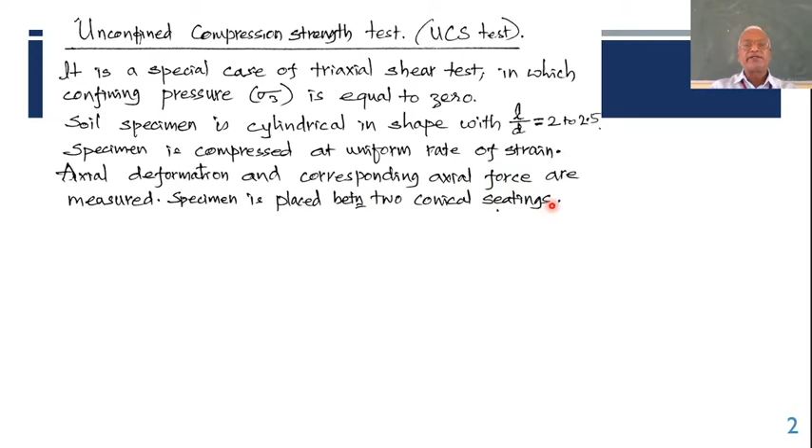When it is placed, it is not flat here or here. The plates between which the specimen is placed, if you exaggerate, will be having slightly a conical shape. I hope you can imagine. Here also this point will be a conical shape. Of course the cone will not be a cone to penetrate, like from the top if you look at it, it will not be like this, very flat, hardly any angle, but there is some inclination. It is not perfectly flat, so that when it is compressed it will not be putting a lot of friction, it expands easily without much friction.

This surface, the top as well as bottom surface, will not be putting a lot of effort to expand itself. That's why it is made conical. You will not be able to observe this with just a normal look, but if you consciously see how the surfaces are, bottom and top, a very fine angle is given so that it is conical.

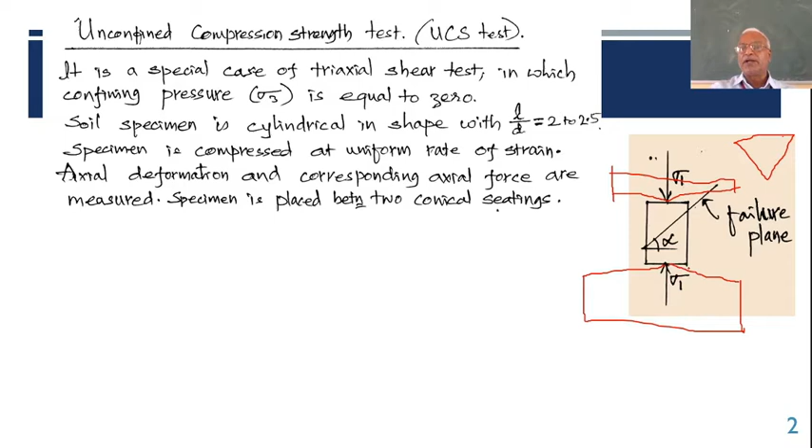The maximum compressive stress resisted by the specimen before failure is called unconfined compressive strength, because there is no confinement. Here there is no confinement, that cell pressure is 0, it is unconfined, that's why it is called so, and you go on applying compressive stress till it fails.

That strength at which it fails, sigma 1, is called Q with a suffix U, that is unconfined compressive strength, and it is equal to the force applied divided by cross sectional area. The force whatever you have applied on the top and bottom - the bottom is fixed, only you are applying from the top through what is known as a proving ring, on which you can read the force indirectly.

So force divided by Ac, the corrected area; A0 is the original or initial area of cross section. If you have taken 38 mm as the diameter, or 3.8 centimeter, pi d squared by 4 gives you A0. But it is to be divided by 1 minus epsilon. Epsilon is nothing but axial strain, that is delta L by L naught. So original length is L naught, that is 7.6 centimeters.

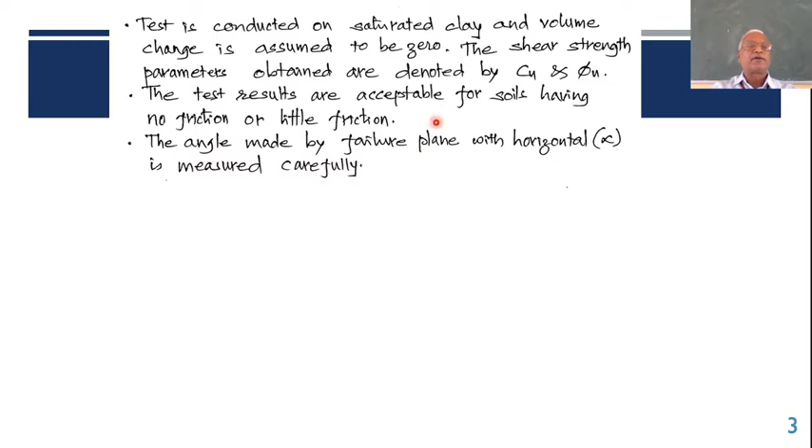The test is conducted on saturated clay and the volume change is assumed to be zero, meaning the volume in the beginning equals the volume in the end. The shear strength parameters obtained are denoted by Cu and phi u. The test results are acceptable for soils having no friction or little friction, that is phi is almost equal to 0. In such cases you can conduct this kind of test.

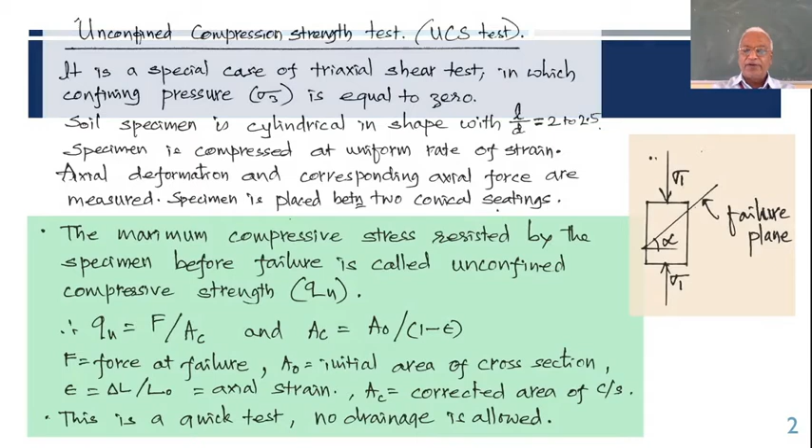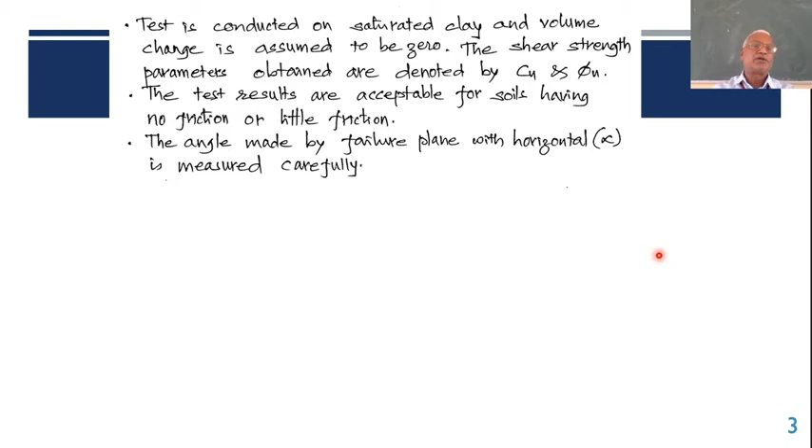The angle made by the failure plane with horizontal, that is alpha, is measured carefully. When it fails, there is obviously a failure plane, and this angle has to be measured properly so that the information is used for further calculations. Generally it is 45 degrees, otherwise if it is slightly more, it will be like 50, 52, 54, 53, and that has to be measured properly.

Alpha is mostly more than 45 degrees. So when it is deformed, it deforms like that. If it has failed exactly at 45 degrees, the Mohr circle for the test will be like this, because you know how to draw the Mohr circle with the basics. This face will give you 0, 0, because there is no normal stress and no shear stress.

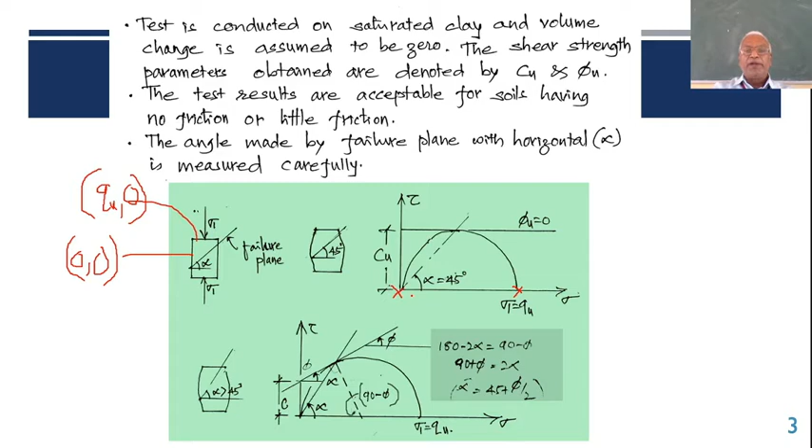That's why the point is at the origin itself, and this face has got QU now, because that is the stress at which it has failed, and there is no shear stress, that's why 0. So the point on the Mohr circle will be QU, 0. These two planes are mutually perpendicular, that's why this should be a diameter. So take the midpoint and draw the circle, that will be the Mohr circle.

Now try to find the origin of planes. How do you find it? I got a horizontal plane, and this plane is represented by QU, 0. So if I draw a line, I get here, so this itself becomes my OP, origin of planes.

Now the failed plane is at an angle of 45 degrees. When I draw a line, I get to the topmost point of the circle, and then when I place a tangent to that point, that will be the failure envelope with equation tau f equal to C. There is no contribution as far as phi is concerned. Otherwise, the general equation would have been tau f equal to C plus sigma tan phi.

Now because phi is 0, the value of tan phi is 0, so sigma tan phi is 0. That's why the equation remains as tau f equal to C in case of the unconfined compression strength test.

Generally this is the case. Otherwise there may be a slightly more angle, alpha may be a bit more. In such cases, maybe it has failed there, and that will be making an angle of phi, which will be nearly 0 or maybe 5 to 10 degrees in that range. With that, alpha is over here.

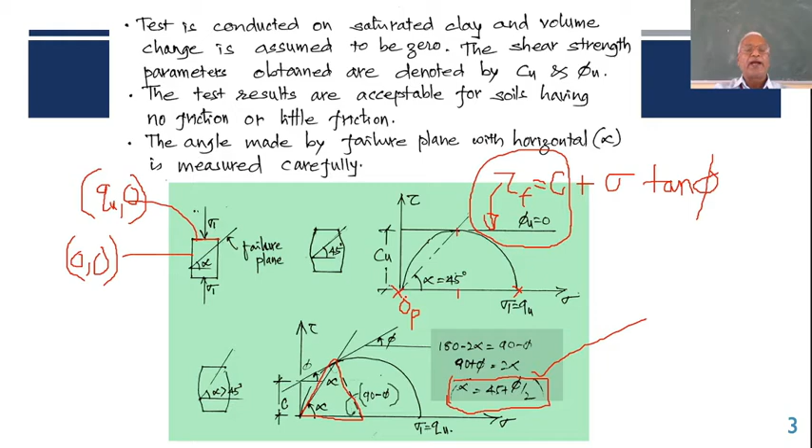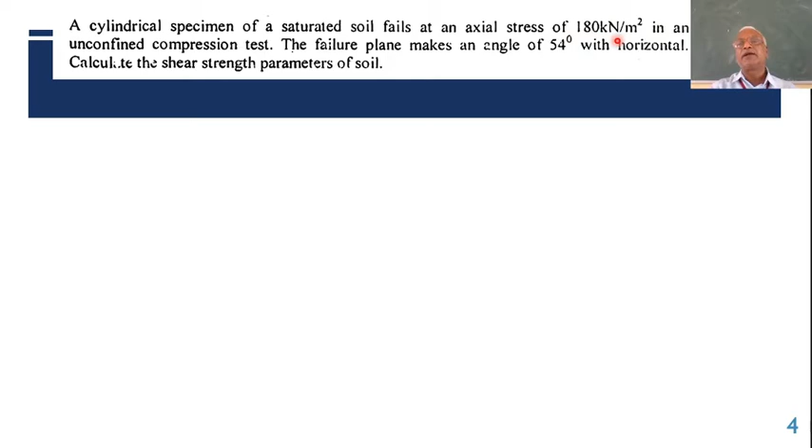Here is an application, one numerical problem I have solved for you. A cylindrical specimen of saturated soil fails at an axial stress of 180 kilonewton per meter square. So 180 kilonewton per meter square is nothing but QU now. Directly the stress is given. If load is given, you have to divide by area, but here directly the stress at failure is given in an unconfined compression test, so it is a UCS test.

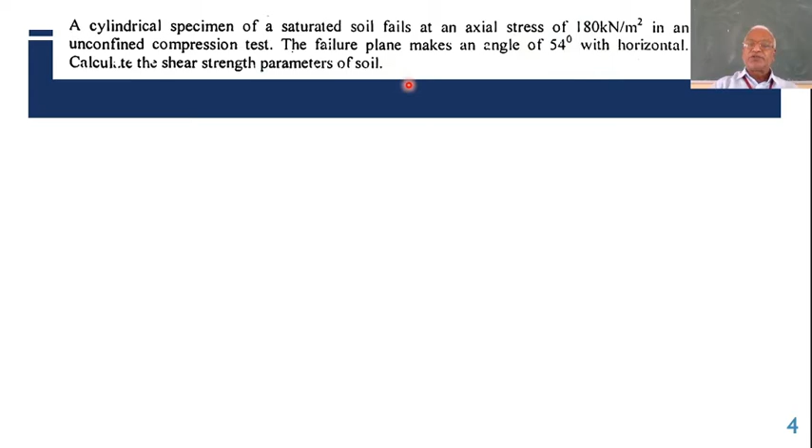The failure plane makes an angle of 54 degrees, this is alpha, with horizontal. Calculate the shear strength parameters of the soil. Very straightforward problem. If I draw the sketch, sigma 3 is 0, sigma 1 is 180. So straight away alpha is 45 plus phi by 2, and 54 is given. If I calculate, phi becomes 54 minus 45, that is 9 into 2, 18 degrees.

Now through this I can calculate Ka and root Ka. Root Ka is tan of 45 minus phi by 2. Ka is tan squared of 45 minus phi by 2. I hope you remember those expressions, otherwise I'll just write them. Ka is nothing but 1 minus sin phi divided by 1 plus sin phi, or it is tan squared of 45 minus phi by 2.

It is only phi by 2, not 45 by 2, right? So this is phi by 2 that has to be minused from 45, and if you write tan squared, then it will be K. If it is root K, it is only tan 45 minus phi by 2. So anyway, you will get the value of K, and then use this equation sigma 3 equal to sigma 1 K minus 2C root K, in which K is already known.

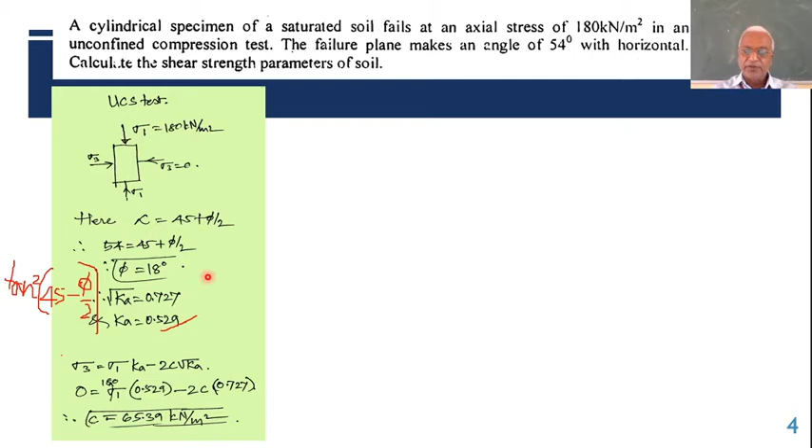But if you draw the graph, the Mohr circle, then this plane, as I told you, vertical plane is 0 0, horizontal plane is 180 0. Here I have drawn 0 180 0. So I draw a circle, then failure plane, origin of planes. If I draw a line parallel to horizontal through 180 0, I get a point which is OP, origin of planes.

The angle of failure plane is 54 degrees. So I draw a line at an angle of 54, and there it intersects. So there I draw a radial line and a line perpendicular to that is inserted so that it becomes tangential. Then I measure this angle phi, which is 18 degrees. How much was ours? Same, 18 degrees. This is angle phi.

And then the intercept on the y-axis gives you the cohesion. So it is 65.39 kilonewton per meter square, the same units. So here it is 65.39. So that's how you can solve it, maybe the graphical way by drawing the Mohr circle.

It is easy if you are well versed with your geometry. Otherwise, analytically you should be able to solve it in this manner, right? Whichever method is fine, unless they mention anything. If they say you have to solve it by graphical method, you have to go for Mohr circle. If they don't mention anything, you are left with both options open.

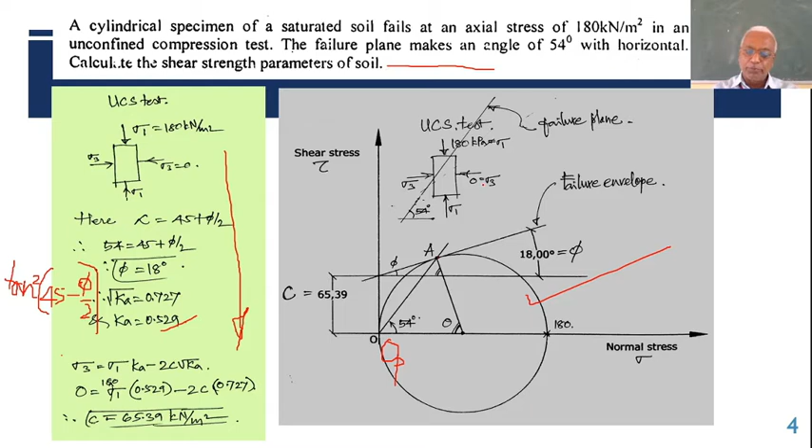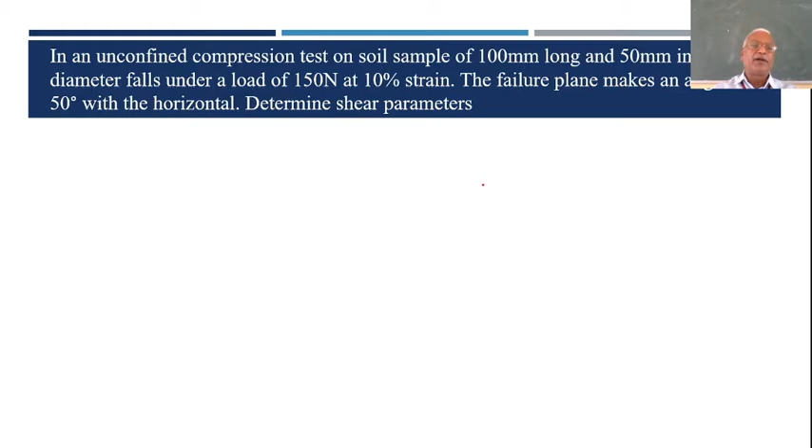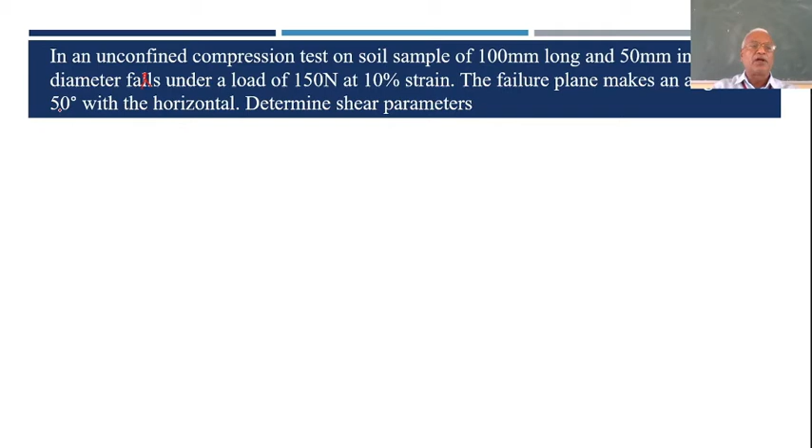Okay, there is one more. In an unconfined compression test on a soil sample, 100 mm long and 50 mm in diameter, it fails under a load of 150 Newton at 10% strain. Epsilon is given, right? Load at failure is given. Cross-sectional diameter is given. The failure plane makes an angle of 50 degrees with horizontal, alpha is given. Determine the shear strength parameters.

Here cross-sectional area is pi 5 squared by 4. I have put it in centimeters. 50 millimeters is 5 squared by 4, that is 19.63 centimeters square. Corrected area, corrected cross-sectional area, AC is given by A divided by 1 minus epsilon. So 19.63, A naught or A original, divided by 1 minus epsilon, 10% strain, so 0.1. It comes out to be 21.82 centimeters square as the corrected area.

Now UCS, unconfined compression strength, will be QU, the ultimate load divided by area. Load is 150 Newton at which it has failed. 150 Newton divided by 21.82 centimeters square gives you 6.875 Newton per centimeter square as the shear strength. But if you want to convert that into kilonewton per meter square, you have to divide Newton by 1000 and divide every centimeter by 100. So in the numerator you get 100 into 100, in the denominator you get 1000. That's why you end up with 68.75 kilonewton per meter square, also called kilopascals, 68.75.

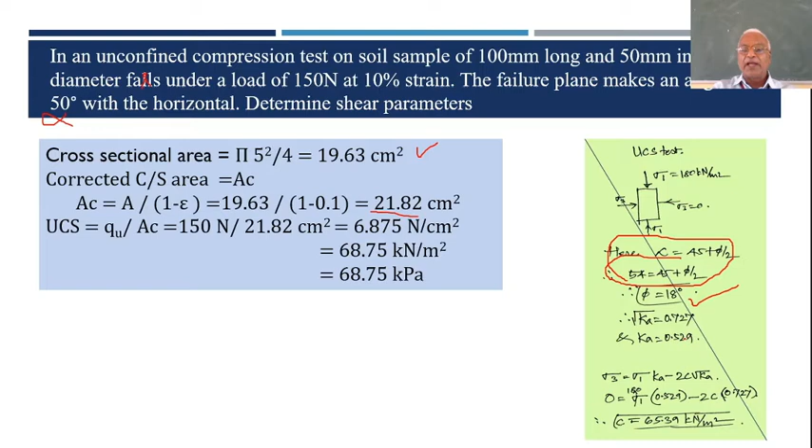Okay, now further it is the same as the earlier problem. Because of that I have just given this, I have not solved it fully, but the procedure to be used is exactly the same. That's why I have put a line there. It is not the same, but similar. You have to use the same equation, alpha equal to 45 plus phi by 2, alpha is 50, you get some phi, calculate Ka, use that in this equation and find out C. So these are the steps to be followed in this problem. I think you'll be able to solve it.

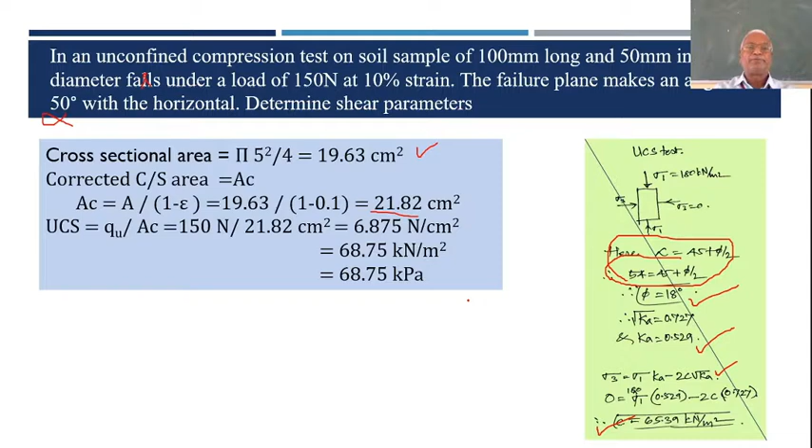Next, based on drainage conditions, we look at the type of shear tests. There are classifications of shear tests, and the classification is very simple to remember. The names are very interesting: UU test, CU test and CD test.

To simulate actual field conditions, three types of shear tests are conducted in the laboratory. Why is it called UU test? The long form is unconsolidated undrained test. CU test is consolidated but undrained test, and CD is consolidated drained test.

CD test is simply called drain test, whereas UU test is simply called quick test. Both nomenclatures are very widely used, so you should know them. UU test, or undrained test, is a quick test, whereas CD test is a very slow test, it takes a lot of time since you have to allow the water to pass out.

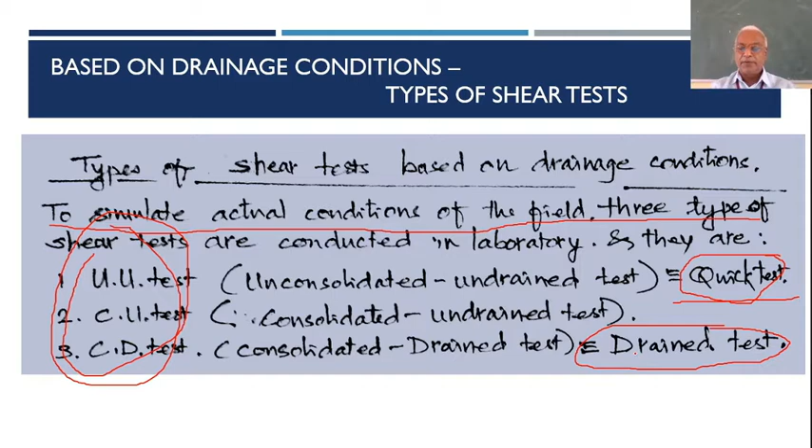Moving to the next slide: essentially there are two stages in any shear test. Note this part - first, application of normal stress, and then shear stress is applied till failure.

What is stage 1? That is normal stress application. In direct shear test, first normal stress is applied, if you remember. Similarly, in triaxial shear test, cell pressure is applied. So the parallel thing in triaxial test is cell pressure, whereas in direct shear test there is a vertical stress applied.

In stage 2, in direct shear test, the shear strain is given and shear resistance is observed or measured, and the maximum shear resistance at failure is noted down, that is tau f, at a particular value of sigma.

In case of triaxial shear test, the axial stress is gradually increased till the soil fails, and that we have called delta sigma, or deviator stress. Anyway, we'll see further.

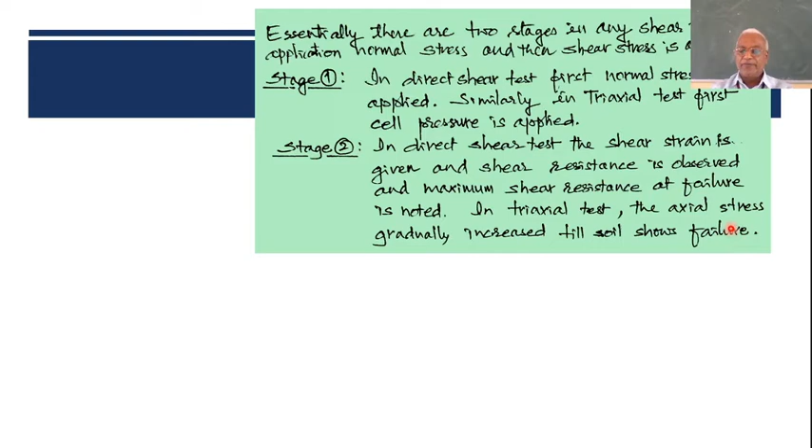So in direct shear test, you apply vertical stress and hold it at that value, go on applying this strain, and the resistance offered at this point is measured. So for one value of sigma, you get one particular value of tau. If you call it sigma 1 applied, you get tau 1.

If you reassemble the soil specimen, for the next specimen you apply sigma 2, maybe an increased or decreased value of normal stress. Again you do the strain, the resistance offered is measured, and if you note down the stress at failure, that identifies tau 2. For sigma 2, tau 2 is there. Like that, the data goes on.

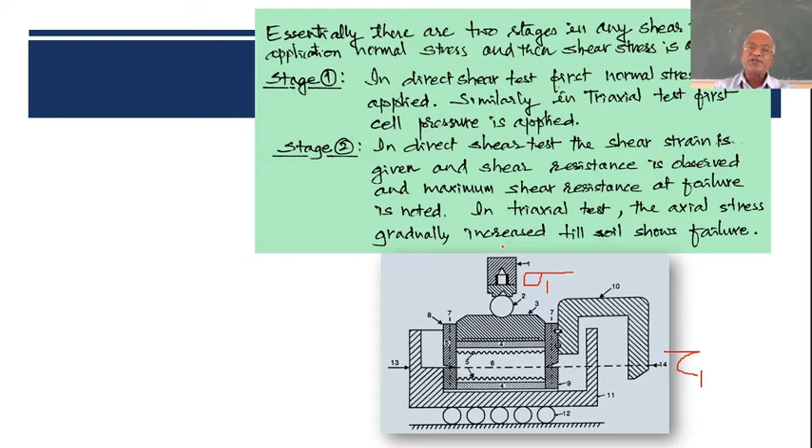Now, in the first stage, when you apply normal stress, if the soil has some moisture in it, the water is squeezed and tries to go out through these porous stones and holes provided. If you allow it to go out, that is allowing the soil to consolidate. Then afterwards, whether you allow it to consolidate or not, you give shear.

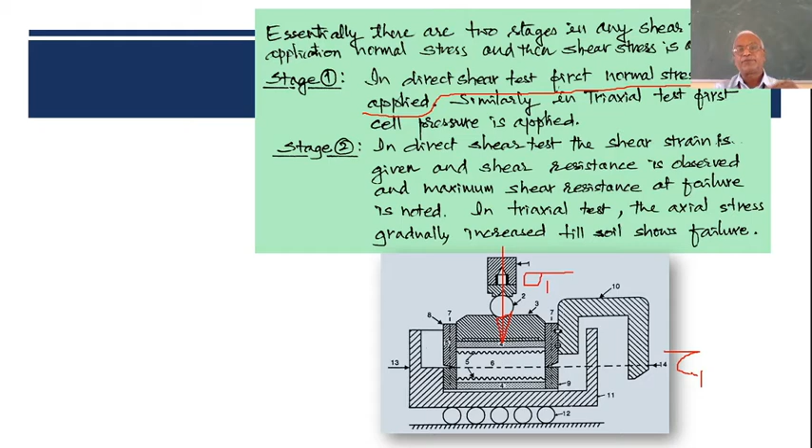In case of triaxial shear test also, the soil specimen is kept here. Now, when you apply the water pressure, it is all normal stress only, everywhere there is normal stress.

When you apply normal stress, if the soil is wet, there is a chance it will ooze out the water or allow the water to pass out. There is an arrangement - you may allow the water to pass out or you may close it. If you allow it to go out, we say it as consolidate, otherwise you don't consolidate, and afterwards you apply a vertical extra delta sigma till failure occurs. That is what is written here - in triaxial test, the axial stress gradually increases till the soil fails.

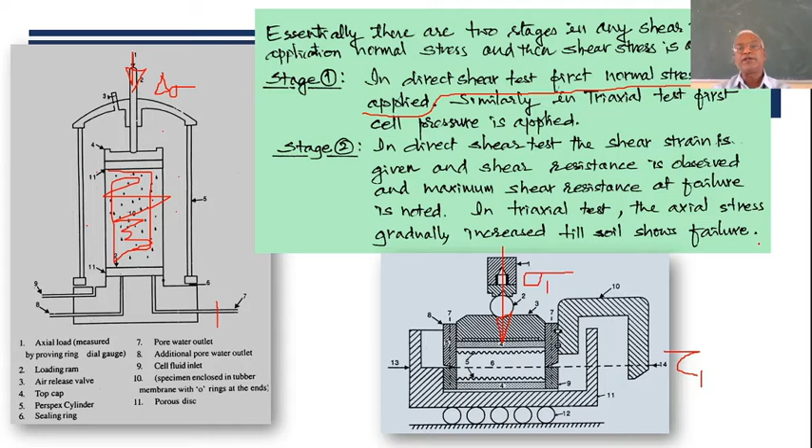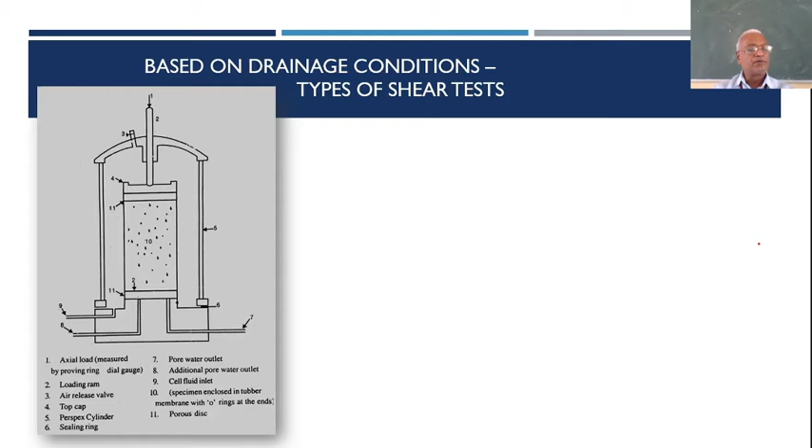So there are two stages you have identified. Now, based on drainage conditions, there are types of shear tests: first one, UU test. I have told you UU, CU and CD test - there are three. Now let's see what is done in UU test.

During both these stages - whatever first stage, normal stress application, and then second stage, shear stress application - in both these stages, water is not allowed to drain. So it is undrained and unconsolidated. Not much time is taken for the test, hence it is referred to as quick test. The resulting shear strength parameters are undrained cohesion and undrained angle of internal friction, phi with suffix u.

That is undrained shear strength parameters. For saturated clays under undrained condition, phi u is equal to 0, hence tau f is equal to cu. This you have seen in UCS test, unconfined compression strength.

We assume that the clay is fully saturated and undrained condition is there, that's why phi u is 0 and tau f is equal to cu.

Okay, now next, CU test. What is the long form? It is consolidated undrained test. Consolidated means what? When you apply first normal stress, you allow the water to go out, right?

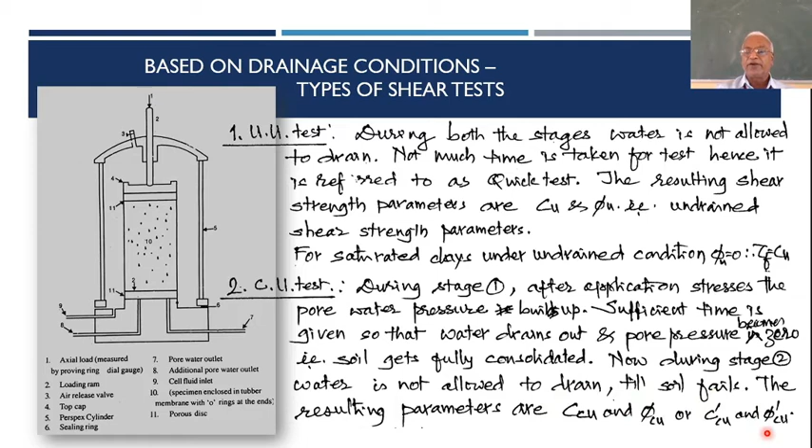So the resulting shear strength parameters are C with the suffix Cu and phi with the suffix Cu, meaning consolidated undrained cohesion, consolidated undrained angle of internal friction, taking total stresses. If you take effective stresses, it will be C dashed and phi dashed.

Okay, the third one, CD test. So here it is consolidated drained test. Means in both the stages you have to allow the water to pass out. Sufficient time is given so that no pore water pressure is allowed to build up at any time. You have to allow the water to just pass out.

You apply a little water pressure here and see that the pressure developed inside the pore water is reduced to 0. You will be having a measuring device, so that how much pressure developed will be shown. That has to become 0, and then afterwards give the next increment. The increment has to be slow, so that you will not allow any building up of pressure inside the water present in the soil, right?

And it takes a lot of time. That's why it is a slow test, takes a good amount of time, and the resulting shear strength parameters are C dashed and phi dashed, that is effective cohesion and effective angle of internal friction, right?

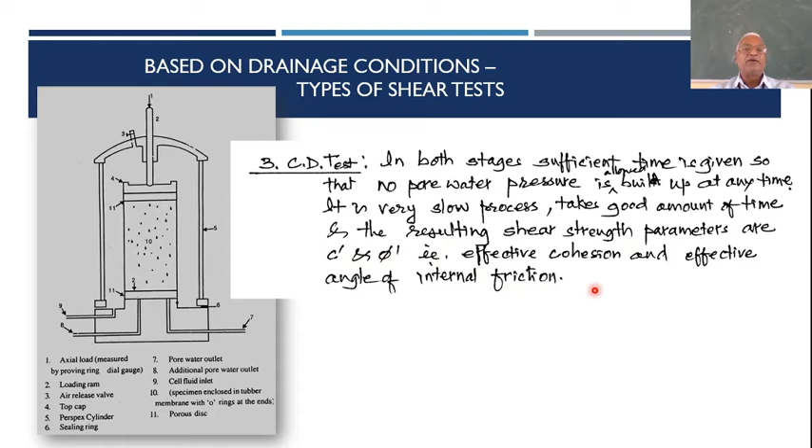Okay, next is vane shear test. There is one more. We have done direct shear, we have done triaxial, a special case of triaxial, unconfined compression strength test, UCS. Then the last one, vane shear test.

This can be a field test or a lab test. In lab, a very small size equipment would be there, vanes would be there, but when you go out on the field, slightly larger vanes would be used. But direct shear test, triaxial and unconfined compression strength tests are purely lab procedures. You don't have any way to conduct it directly on the field. But vane shear test is the one which can be conducted on the field also, if you have got an equipment which can be used there on the field, right?

So it is a quick test used to determine the undrained shear strength of cohesive soil. The equipment consists of steel plates welded perpendicular to each other at the end of a steel rod. Through this rod, rotation can be applied and the torque can be measured.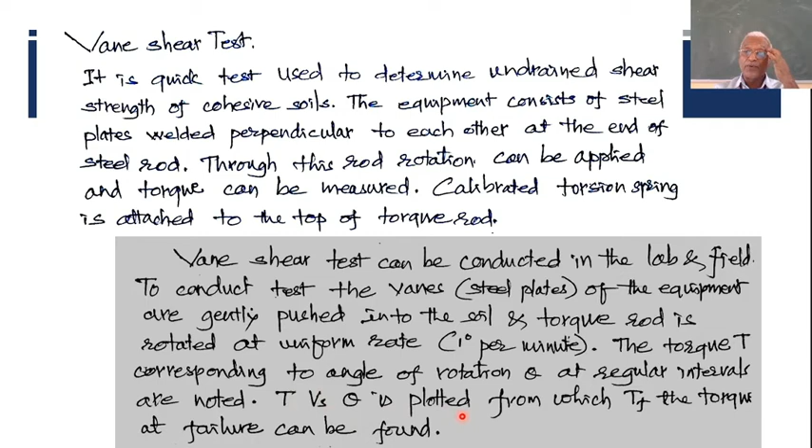Vane shear test can be conducted in the lab and also in the field. To conduct the test, the vanes, that is steel plates of the equipment, are gently pushed into the soil and the torque rod is rotated at a uniform rate, that is 1 degree per minute. The torque T corresponding to the angle of rotation theta at regular intervals are noted down. Now T versus theta is plotted, from which T f, the torque at failure, can be found, and that will be nothing but the shear strength of the soil.

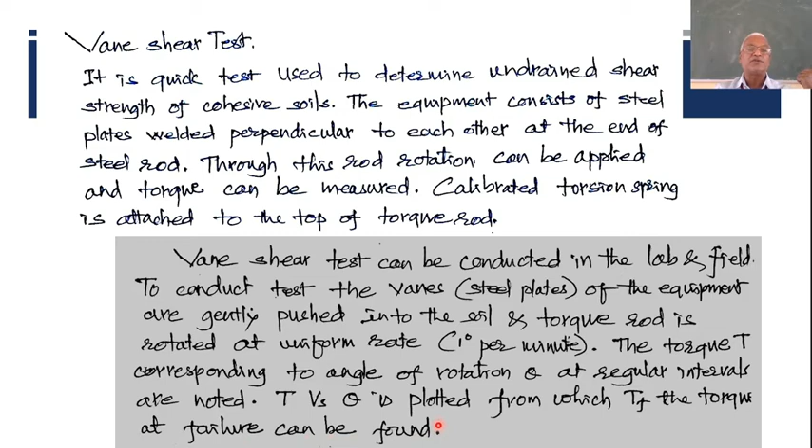Analytically, a slightly different procedure is there, we'll see that. Now, analytical proof for the shear strength, tau f is shear strength.

So here if I have vanes having height h, d the diameter of the equipment, and tau f is the shear strength of the soil. Assuming the vanes are pushed into the ground so that resistance is offered by the cylindrical surface as well as both top and bottom circular faces. So it is inside the soil.

Actually how it is done is there will be a container in which the soil will be fully filled, and this equipment is inserted inside so that it goes up to some depth, and then this is rotated. When you rotate, it tries to shear the cylindrical surface on the periphery, also it shears the circular surface, and the resistance offered will be maximum at this point because displacement is maximum here.

As far as the cylindrical surface is concerned, full value of tau f acts all along the cylindrical surface. Whereas if you take the circular surface on top, the maximum resistance will be at this point, and as you go inside, here the motion is 0, here the motion is maximum, full value of tau f comes into action, here it is 0, so it is a straight line variation. The same variation is shown here.

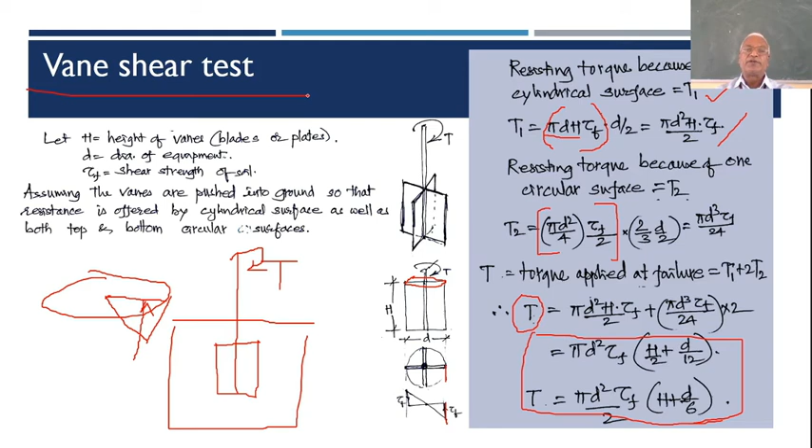A vane of 10 centimeter long, so h is given as 10 centimeter, diameter 8 centimeter, was pressed into soft clay at the bottom of a borehole. Torque was applied and gradually increased to 40 Newton meter when failure took place. So this torque is given, and diameter is already known. What is left in the equation is tau f, which is nothing but shear strength. So substitute everything and find out tau f.

Let us say this value is known as tau f1. Now subsequently the vane was rotated rapidly so as to completely remold the soil, and after some time the remolded soil was sheared at a torque of 15 Newton meter. Once again this torque has become 15, and all the dimensions h and d remain the same. You end up with a different value of tau f, which we call the remolded sample shear strength, whereas the earlier one is the undisturbed soil strength. Now if you take the ratio tau f1 by tau f2, what do you call it as? If you remember, it is called sensitivity: the shear strength without any disturbance divided by the strength after remolding.

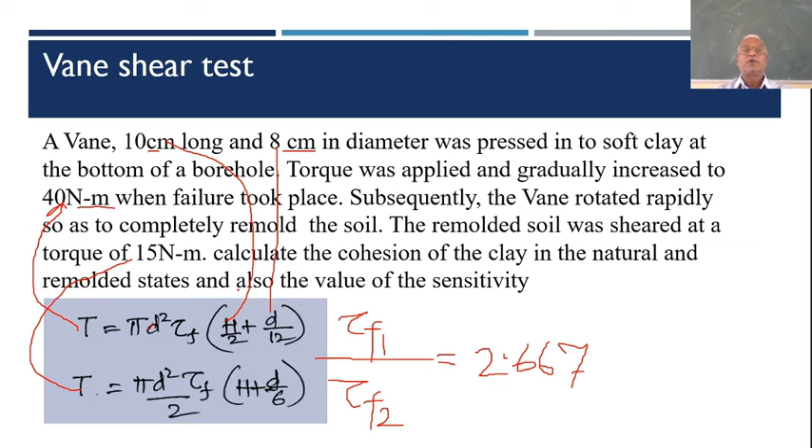The results of a shear box test are as shown in the figure. This is the next problem: determine the parameters. Would failure occur on a plane within the soil mass when the shear stress is 122 kilonewton per meter square and normal stress is 246 kilonewton per meter square?

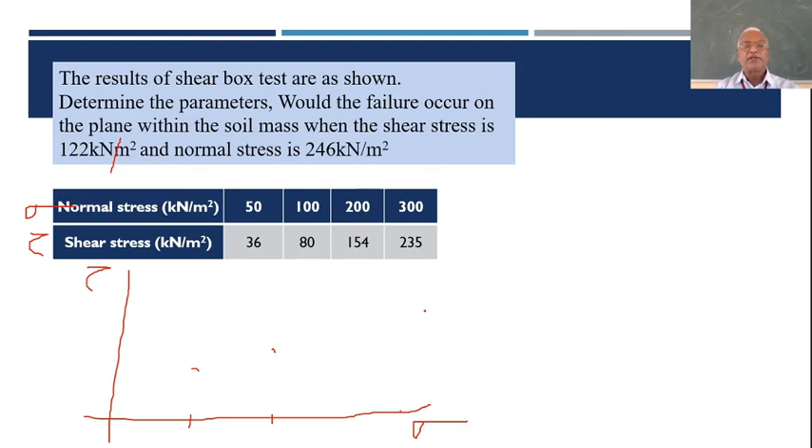This is slightly tricky, though the first part is quite simple. There are values given: normal stress sigma and shear stress tau. So if you plot sigma and tau on a graph with the same scale on both axes, using values like normal stress 50 with 36, 100 with 80, 200 with 154, 300 with some value, you draw a straight line. The intercept on the y-axis gives you C, which you measure, and the angle made with the horizontal is known as phi. If you take some scale and draw it on the graph, you'll be able to do all this.

Now the next part is: would failure occur on a plane within the soil mass when shear stress is 122 and normal stress is 246? What you should do is, on the graph already drawn, go to normal stress 246, then climb up and see the value there. If this value equals 122, it is about to fail. If 122 is below that value, it is safe and hasn't failed. If 122 is above, such a case never exists, because once 246 is applied, failure occurs before reaching that shear stress value, so you'd never get a chance to apply 122. If the point is below the line, failure will not occur; if above the line, failure occurs; if exactly on the line, it is impending motion, about to fail.

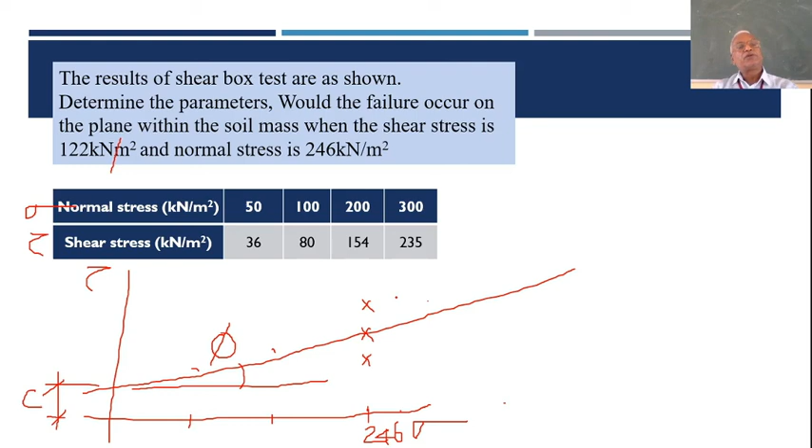So with this, I think we'll close the shear strength chapter. Thank you.